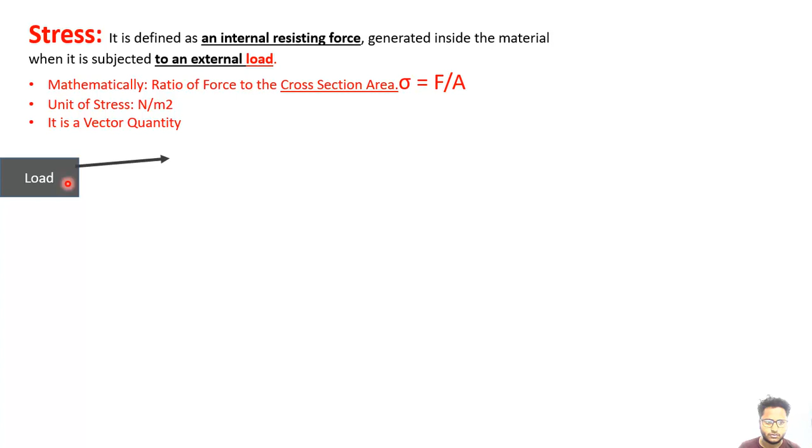So we have mentioned this load, means there are different types of load. Mainly there are three types of loads. First is known as force, second is known as bending moment, or simply you can say bending, or we can say moment, and third is torsion or torque.

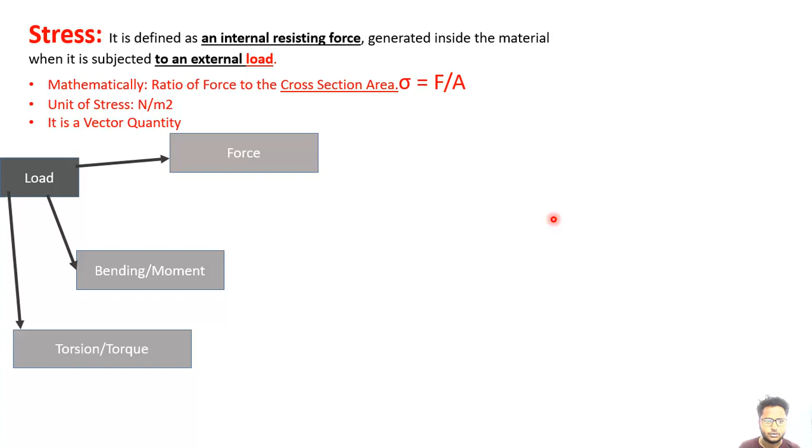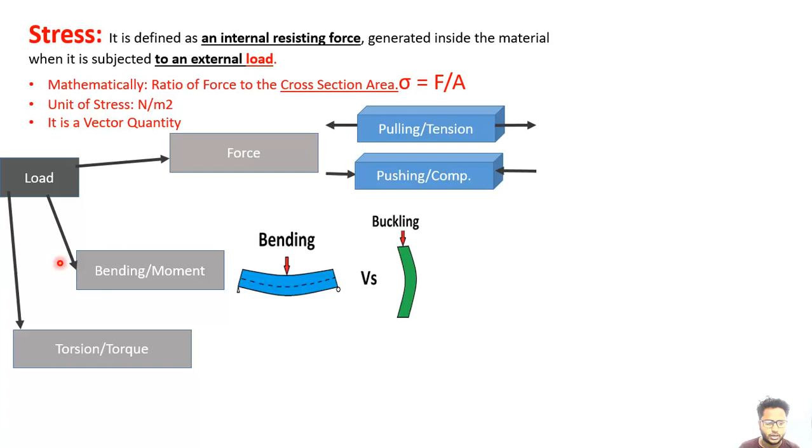So now I'm going to show what is the cross section area for the load which is known as force.

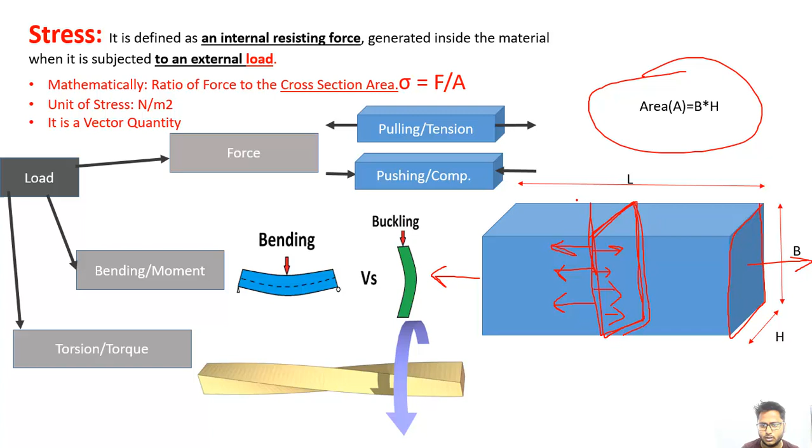If we assume that these dimensions are very less compared with this length dimension, there is a very less change in B into H, but length will change with a certain value. So strain will be shown only in the L direction. So it is defined as the ratio of change in dimension. This change in dimension can be change in length to the original length.

We can put change in width to the original width. It can be change in height to the original height. So dimension can be anything, but if we are taking height here, then we have to take original height here. So mathematically strain is denoted by epsilon. It is defined as change in dimension divided by original dimension. If we use length here, we have to use length here also.

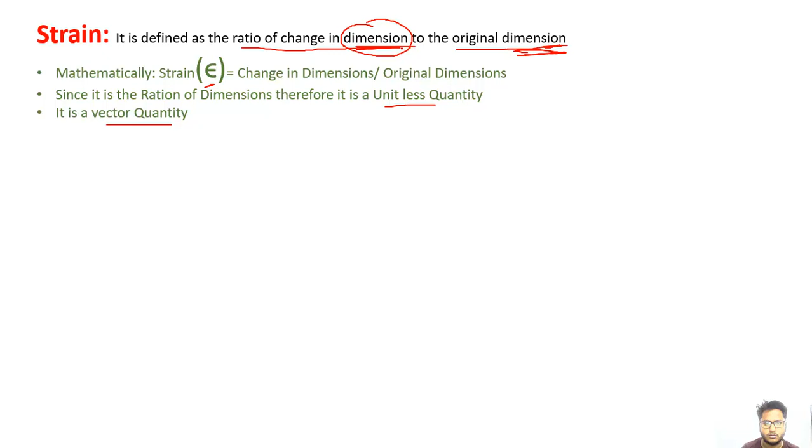Since it is the ratio of the dimensions, therefore it is a unitless quantity. It is a vector quantity because it is change in length in a certain direction. The change in length is in a certain direction, so it is a vector quantity.

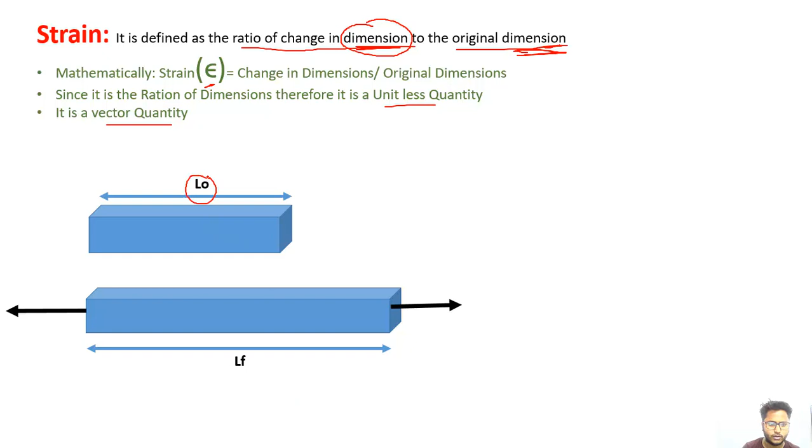So we are going to see what is strain here. This is the material which is under a load in the leftward direction and with equal load in the right direction, in the length direction, which is responsible for the change in length of the material. So we can see the length is increased. Original length is LO, final length is LF.

So what is the strain here? The strain is change in length to the original length, because we are going to consider the strain in the L direction only. So change in length is the distance between these. Okay, so what is the distance between these? LF minus LO. This total LF minus LO is delta L.

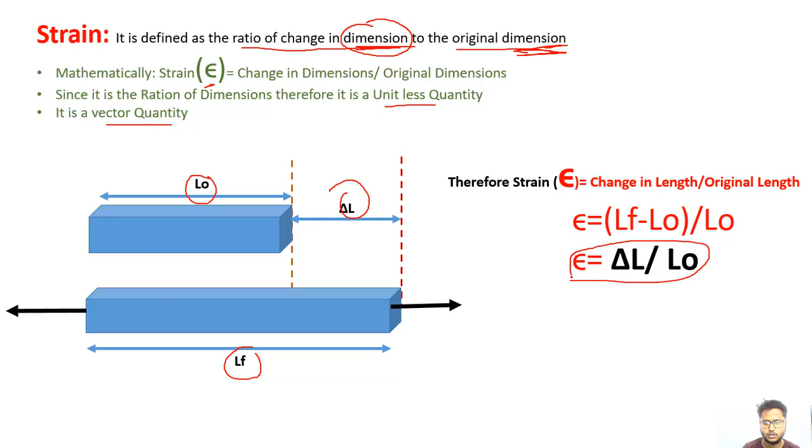This is delta L. So strain equals delta L upon L original. So this is the formula for the strain. Next is Hooke's law. This is a very important law for the relation of stress and strain.

So it states that when a material is under a load, the stress generated inside the material is directly proportional to the strain generated. Means according to Hooke's law, stress is directly proportional to strain. So sigma equals E into epsilon, where E is the proportionality constant.

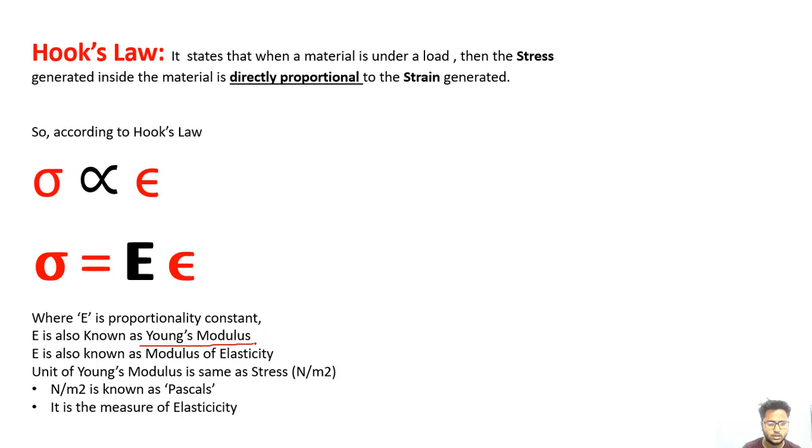Okay, so where E is the proportionality constant, E is also known as Young's modulus, and we have to remember this equation very importantly. And E is also known as modulus of elasticity. It is a proportionality constant. For the unit of Young's modulus, since strain is unitless and stress is Newton per meter square, this is also Newton per meter square.

And Newton per meter square, as we have already done in subjects like IC engine, is also known as Pascal. It is the measure of elasticity. There is a mistake in spelling, elasticity.

So what is the meaning of measure of elasticity? Means if the value of Young's modulus of any material is more than another material, we can say that material is more elastic. But what is elasticity? We have already seen in the previous parts that if a material regains its shape and size, then it is known as more elastic.

Or we can say if a material restricts its change in shape, or restricts deformation, that material is known as more elastic. So this relation can be written as Young's modulus equals stress upon strain. So it is the ratio of stress and strain.

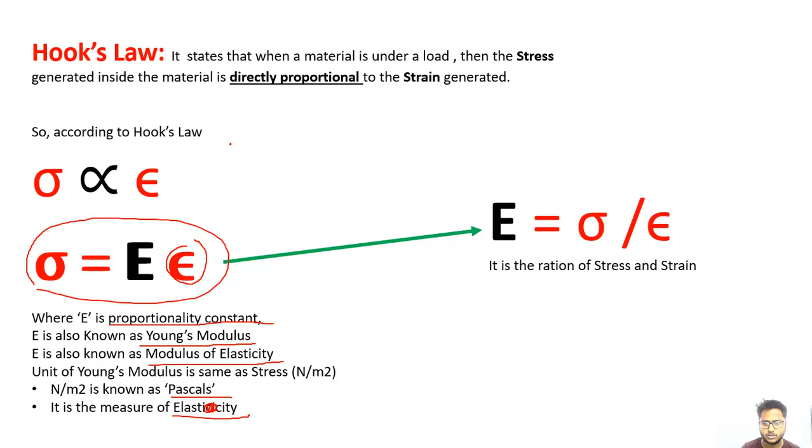So now we are going to see the change in length formula. It is very simple. We can see the same diagram. This is the original length, this is the final length, and the change in length is delta L when the force is applied. The force is applied here, F, and here also F. So the stress is F upon A, and the strain is delta L upon LO.

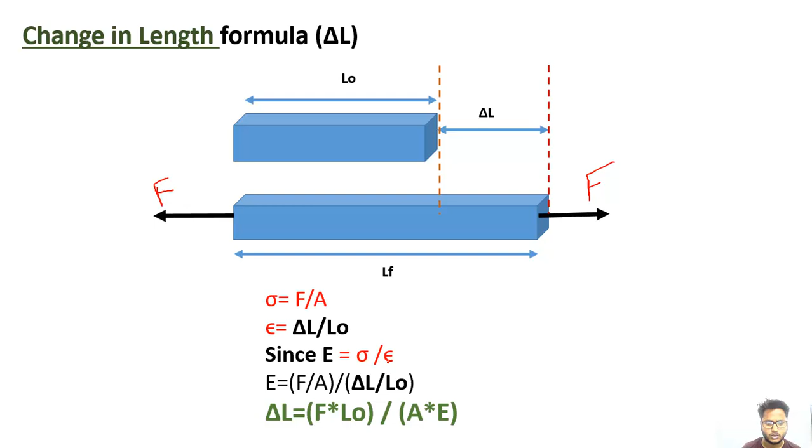Since E equals sigma upon epsilon, this is Hooke's law. From this formula, we put sigma equals F upon A, and epsilon equals delta L upon LO, because strain is change in length upon original length. So delta L equals FLO upon AE.

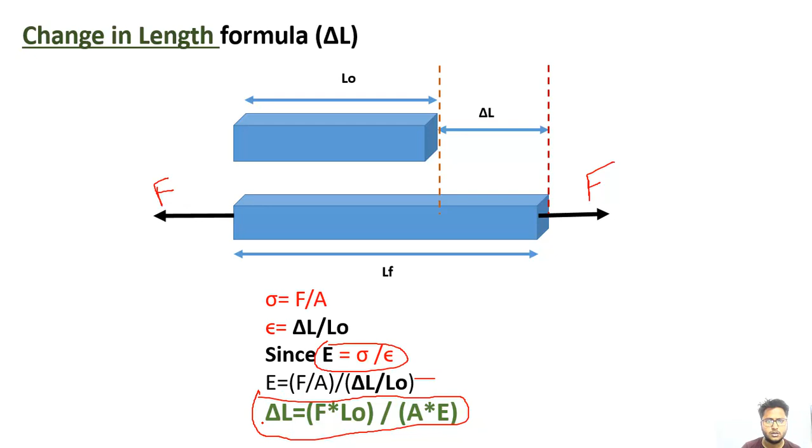This formula is very important, because if I give you a numerical, like a 5 meter bar under 50 Newton of force, Young's modulus 200 gigapascal, and the rod diameter is 20 mm, find the total change in length due to this load. You can find the change in length by putting in the values of all the given data.

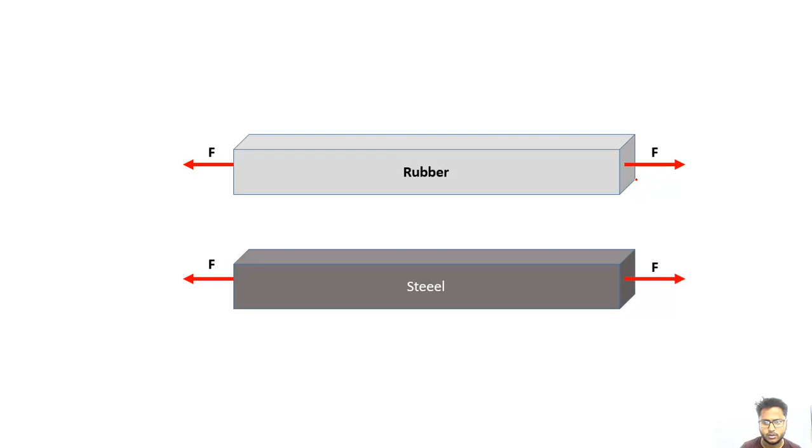Now I'm going to give a very interesting question. There is a specimen of rubber and steel, and the dimensions of both materials are the same: length, width and height are the same, and the force applied is also the same. So which is more elastic, rubber or steel, if both are under the same tension force with the same dimensions?

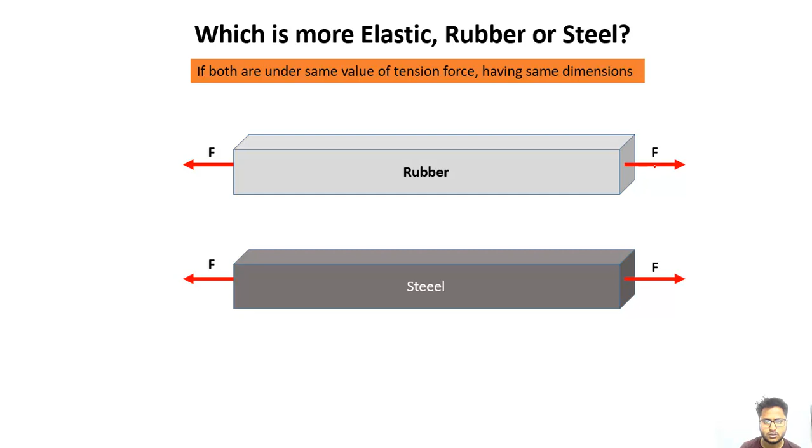Okay, so I'm giving you a hint that the value of Young's modulus will give you the answer. So find the Young's modulus for both materials in this condition.